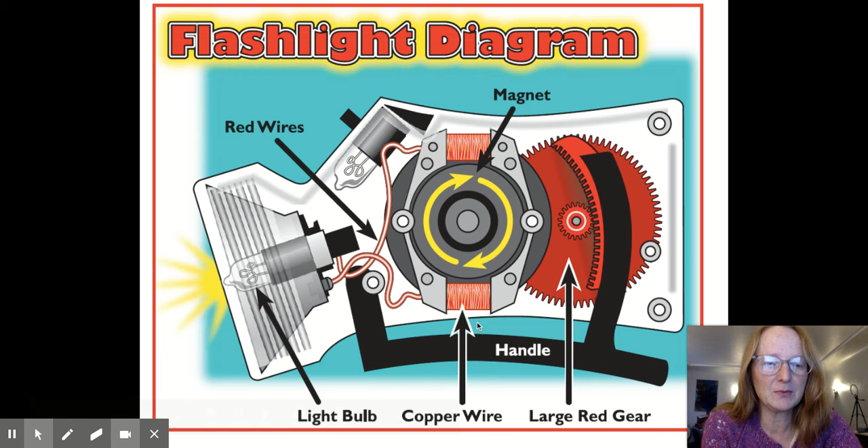Seems pretty simple, but that's how we're going to be making electricity, let's say in a coal-fired plant. You take coal, you burn it, it heats up water. That water creates some steam. That steam creates enough pressure to spin this turbine. And that turbine is spinning a magnet around some copper wire, and that's going to create an electrical field.

Now, coal is a fossil fuel, and so is natural gas. So you can think of the coal and natural gas plant as the same thing. They're heating up water to make this spin, which spins the magnet or the copper wire.

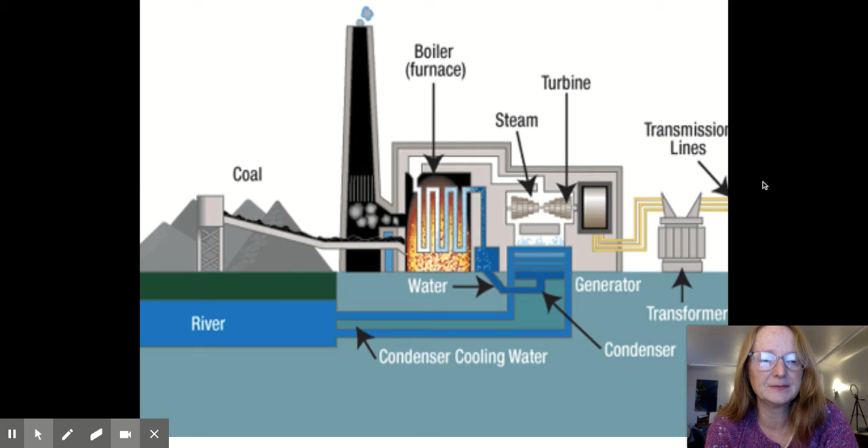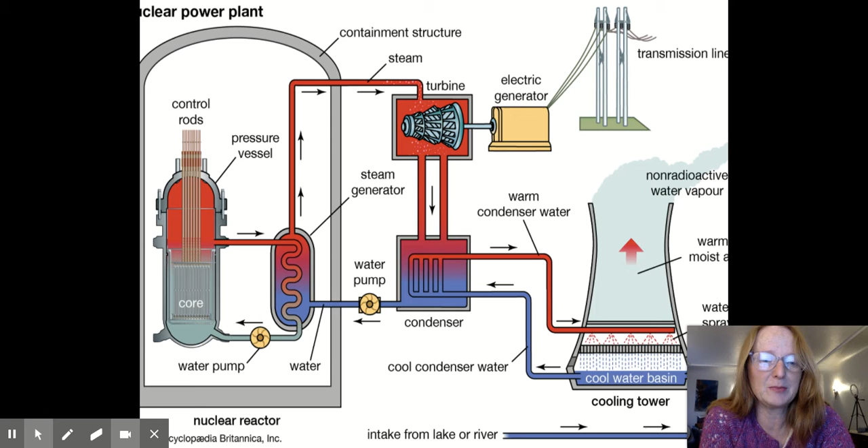Let's take a look at nuclear power. Same thing, except instead of burning coal or natural gas, you're using nuclear fuel to generate enough heat to spin this turbine, and it's going to spin a magnet and some copper wire to create an electrical field.

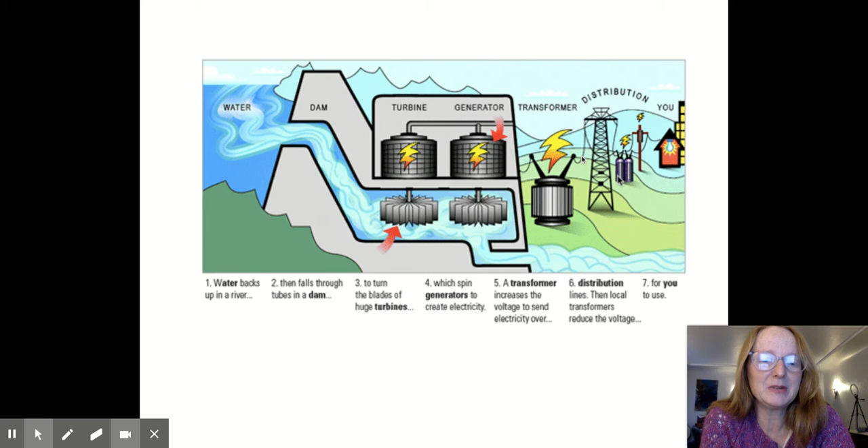Let's take a look at a dam. The dam is really important to you because that's our main source of energy here in the state of Washington. You've got a big reservoir, a big lake. It allows a little bit of water through. It spins a turbine. That turbine is spinning a magnet, some copper wire, and it creates electricity. And it goes over these big power lines right there.

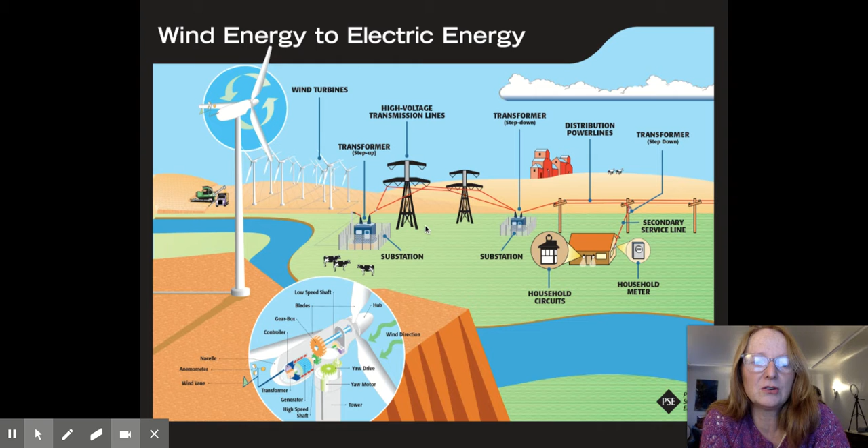So how about a wind turbine? Same thing. What is spinning? You need something to spin that generator, that magnet and copper wire. So what we're really looking for is, can we get something to spin? That's what it's really all about. So here's our wind, the same thing.

Let's take a look at the types of energy that we have, and I'm going to ask you guys these questions on Friday, so pay attention. We're going to take a look at 'works best on a clear day' - that's our solar energy.

'Is a fossil fuel that burns cleaner than coal' - that's natural gas. 'Produces radioactive waste' - the only one that can be is nuclear. 'Has reached its maximum potential in the Pacific Northwest' - that's hydroelectric, because we only have so many rivers, so many dams that we can build. And 'is the fastest growing source of energy here in the Northwest' - that is wind energy.

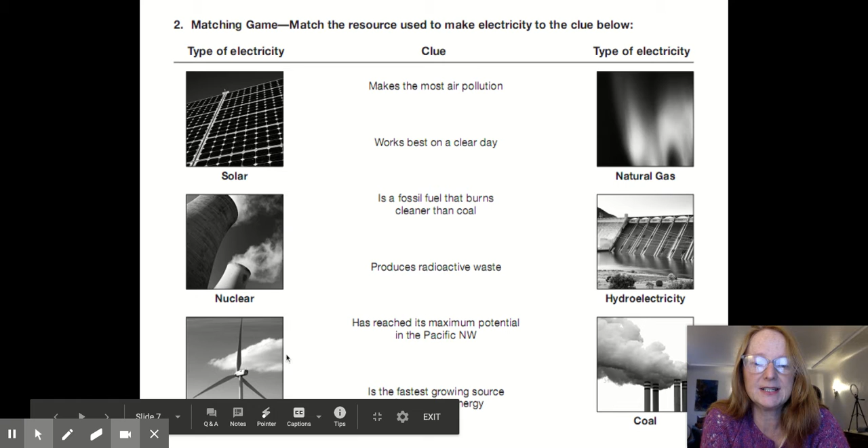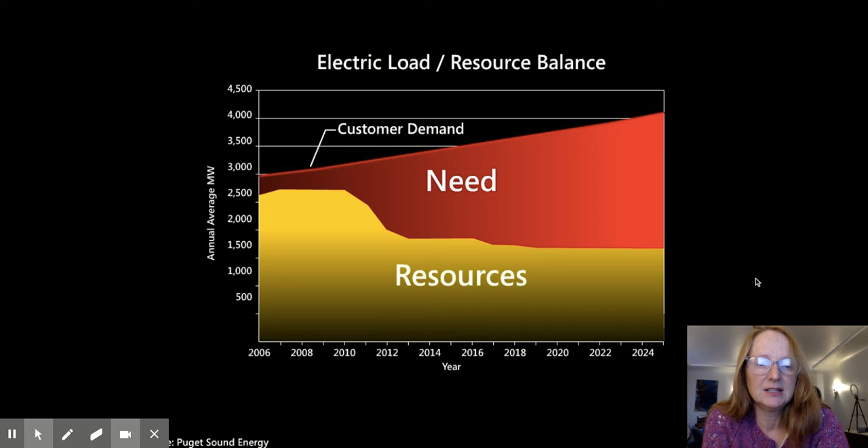Let's take a look at why this is a big deal. Resources, that means the amount of coal, nuclear energy, natural gas that we have - here it is. And the need - notice that we're getting more people on the planet, we're going to need more energy. So the need is increasing while our resources are going down. So we've got to do something.

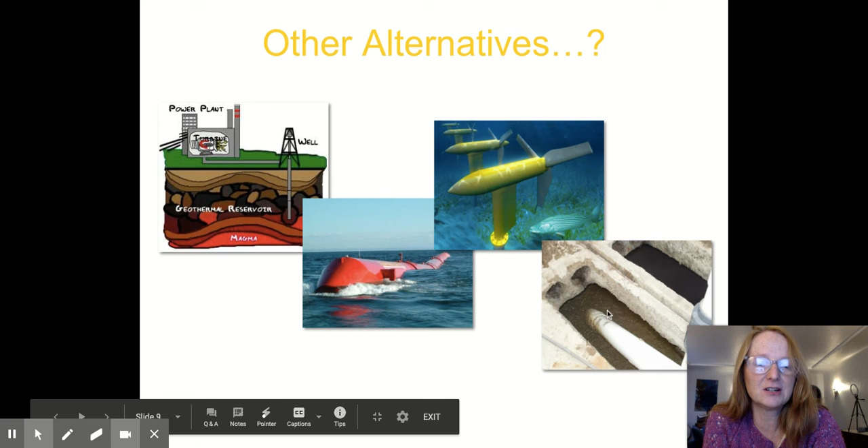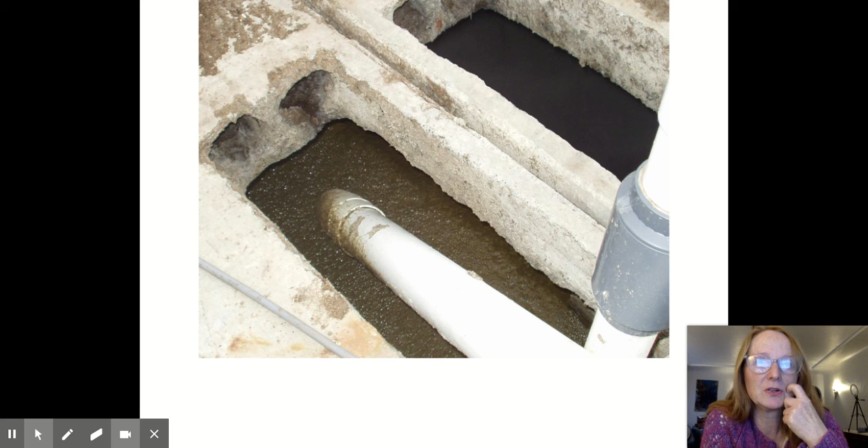And then there's this one, which is always kind of fun to talk about. It's poop, or what we call biomass or bio-waste. We get it from cows, and they're actually doing big experiments here in the state up north, saving all the cow poop, and it generates its own gas. They have a big pipe that pulls out the gas. You burn the gas, same thing, it creates enough pressure to turn a magnet in the copper wire.

So here's something else I want to teach you about, something that is happening in your own house. They're called energy vampires. These are things that are using energy all the time, but don't necessarily need to. So sometime this week, I'm going to ask you to walk around your house and look for energy vampires - appliances that are on all the time that really don't need to be, like anything with a clock on it, a computer, DVD player, PlayStation - all of those are energy vampires.

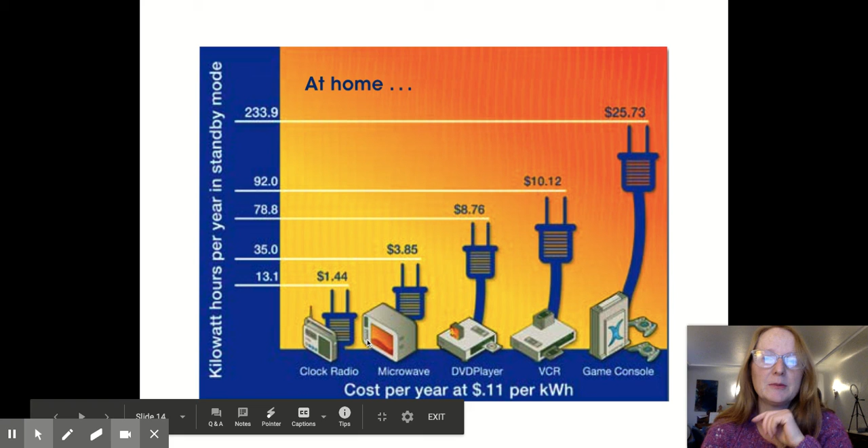So we're going to talk a little bit more about that in our Google Meet about what we can do about it. So what you learned: types of energy, a little bit about how energy is created, some alternative sources, and some energy vampires. You can always go back to this because on Friday you're going to have a little quiz. Thanks for watching.